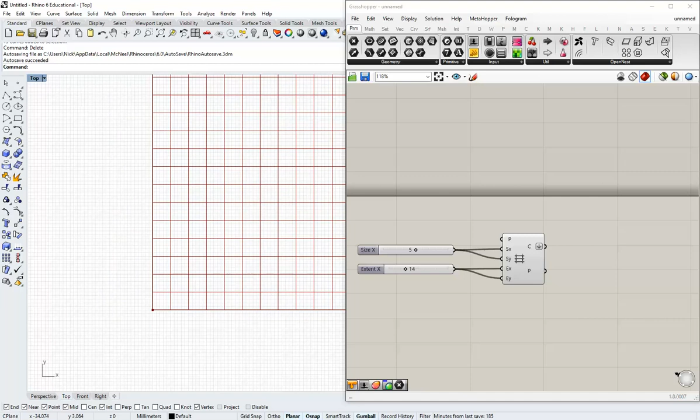Okay, building on this exercise, we're going to talk a little bit about random distributions, and we're going to set up a tiling for that. So you can see here I've got a grid, and you can make it whatever size you like. This fills my screen relatively well, so I'm going to go with that. I'm going to get into Rhino for a second here, similar to what we saw before.

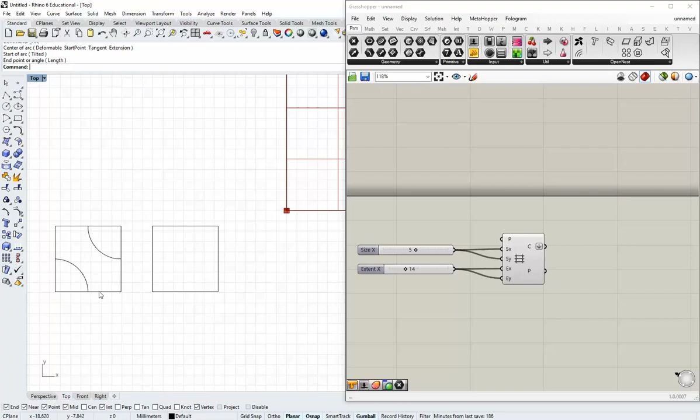I'm just going to draw a box, and then I'll draw another one. All right, just two rectangles. And then for this one, I'm going to draw an arc. I'm going to select that arc command, start at a corner, go to the midpoint, and the other midpoint that's adjacent there. Do another arc similar to that. And then I'll draw the opposite of this, starting with the other two corners. All right, I do that.

Now with this setup, these are the only two really that I can have. This kind of exhausts all possibilities in terms of the way these tiles are related to one another. So that's really what we need.

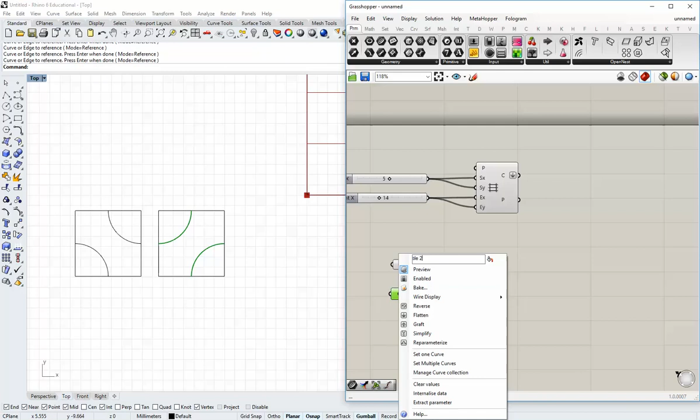So let's go ahead and start bringing this stuff in, kind of like what we saw in the last one. I'll grab these first two curves here for tile 1, then grab the next two for tile 2. I'll grab the boundaries for the tiles, and the other ones as well. Alright, looks good. Tile 1, tile 1, tile 2, tile 2. Great.

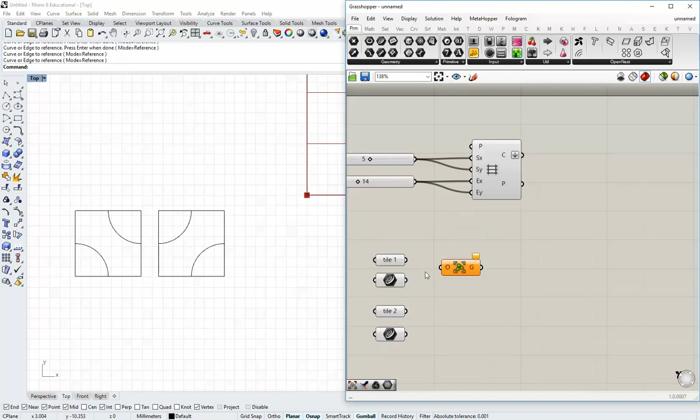Okay, well, we still need to set a group, so I'm just going to go ahead and group that tile geometry, right? Just the two curves in there like that.

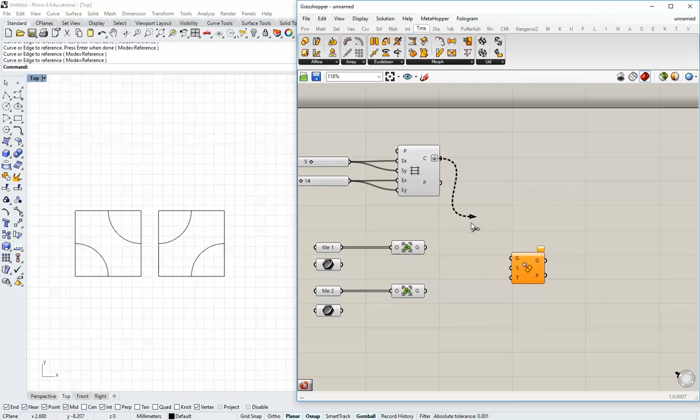In this case, we're going to jump directly into remapping before we start organizing the pattern. So I'm just going to go back over to Transform here. Under Affine, you'll find the rectangle mapping like we did before. The target are these boxes, our grid boxes here. You can zoom out a bit. The geometry we're dealing with is the tiling.

And I'm not going to merge anything this time. Actually, we're going to end up using two of these. We're going to make two overlapping patterns, and then we're going to kind of break it down from there. And then these here are the boundaries for that one. Okay, so that's going to start showing up.

I'm going to do another one, copy and paste that. Instead with this, I'm going to use, making sure that we're using the proper one. Okay, so it's going to look like circles. It's not, but it's going to look like it. And we can verify that here. Right? So we have kind of these opposite overlapping patterns.

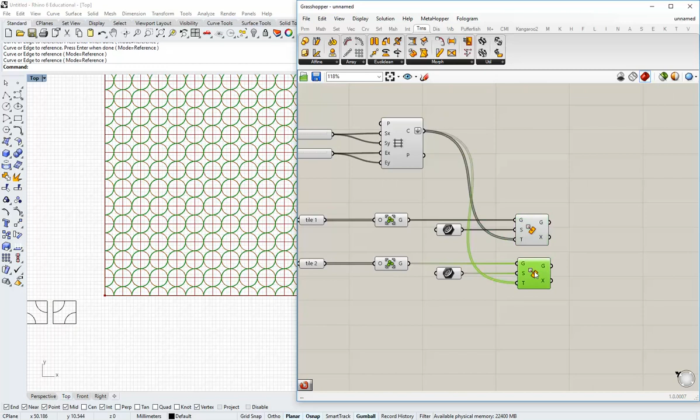Overlapping patterns emerging here. Now we're going to use a random, basically a random selection process to remove some of these and keep others in order to kind of reveal this really interesting sort of looping continuous lines that interlock with one another.

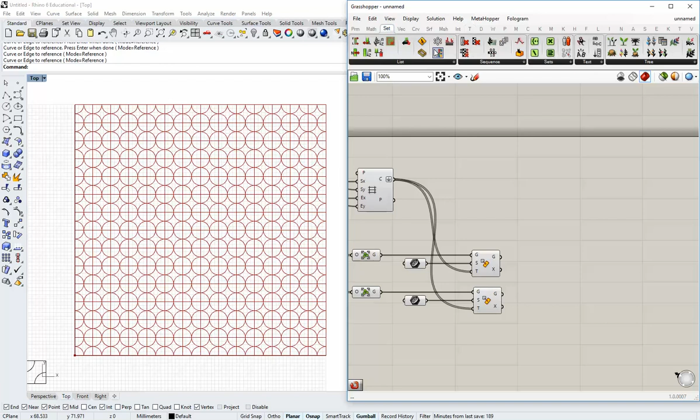Okay, so I'm going to go over to Sets here, and I'm going to grab under Sequence, the Random component. This is going to kind of, it's a pseudo-random number generator. I am going to need a range for this. We really just need a min-max to cover all possible tile options, which really are only two. So it's really just zeros and ones.

Now, if we want a random distribution of zeros and ones, we can get a more even distribution if we kind of expand our domain for that. And there's a little trick for this. So what I'll do is I'll grab a Construct Domain component. The way I've been doing this is to just sort of place in, so let's just do negative 0.49, right, because we're going to do some rounding. This will make sense in a minute. So negative 0.49, and then I'm going to go with positive 1.49.

Put that into B. And then this is going to come into our input there. The number of things overall that we need is going to come from the number of cell outlines we have, right, number of grid outlines. So we'll go to List Length. There's the length here, and that's where we put that in there. We'll deal with the seed in just a moment.

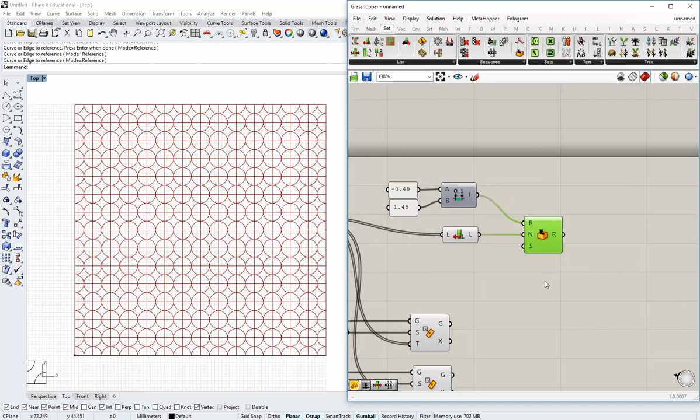Now, there's going to be some decimal points here. In order to do some quick, simple rounding, we can just force those to be integers. So we can just grab over here under parameters and primitive this little integer component.

And now that's going to give us a bunch of zeros and ones, because those decimal values are going to be those random numbers that are between its lowest value and its highest value. And those decimals are actually 5 or 6 values past the decimal point, but they'll still round to either the closest 1 or the closest 0.

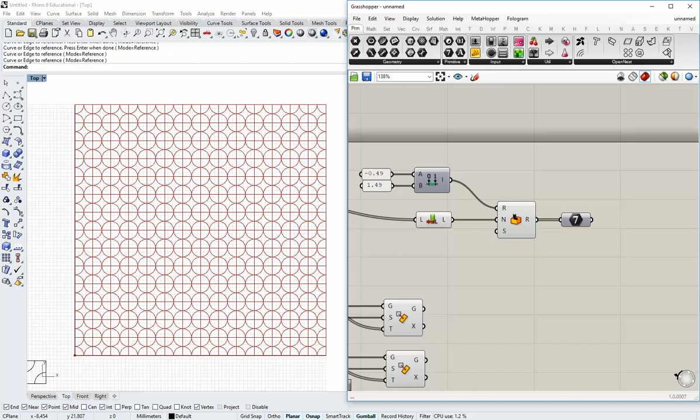Again, if we expand a little bit of our domain for this, we'll get more ones and zeros in a more evenly distributed way, given the random algorithm that's basically being used here within this little black box. All right, so that gives us a bunch of ones and zeros, which is what we need in order to break this pattern down.

And now to do that, we're going to arrange the tiles using the pick and choose. So we'll go over to sets, list, and pick and choose here. Our pattern is going to be this that we just developed, and our inputs are going to be these two. Let's go ahead and hide these, and what's revealed in the end is this pattern here.

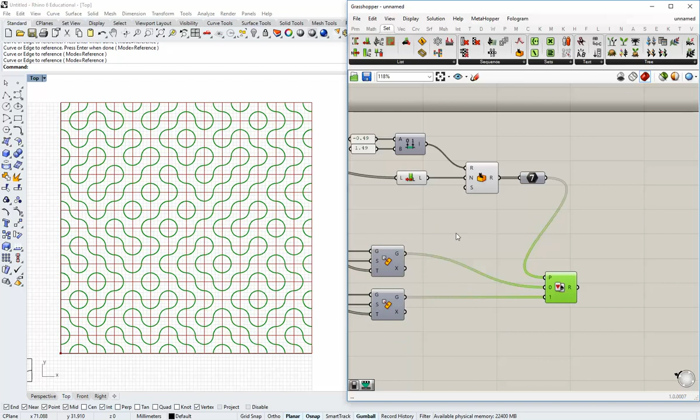So this is just an example of using a simple tiling arrangement that in this case is overlapping all the possibilities, and then using the random pattern creation to pick which ones we're going to see within each cell at any given space. So within this square, it's going to pick the first group, which looks like it's going to be 1. So that will be this one, and so on down the line.

It's really amazing because what we get is a very intricate patterning here of continuous lines that completely transcend the grid from which it came. These are all continuous polycurves. If you join them, they'll be continuous all the way through.

Okay, so this is one way to introduce randomness to it. Of course, this is just one tiling system. These curves are just one way to think about it. There are many, many others. You can draw basically whatever you'd like, so long as things line up at the midpoint, or at least at a common area or a common point along these edges.

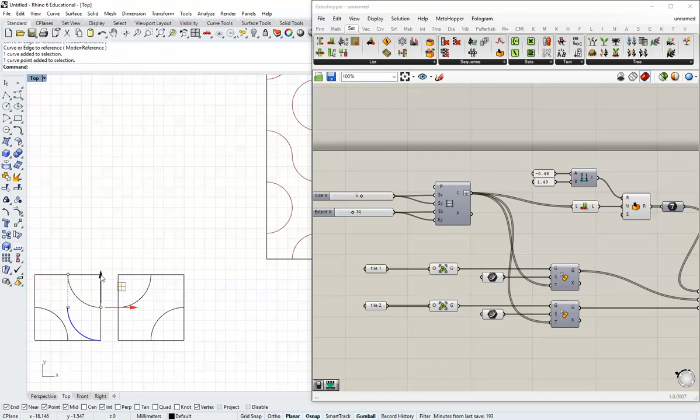Think about how it's going to have to connect to the next cell in space, right? So if you have one that is down here, for example, if I just grab that point and move it, it should update, and actually it will fail. You can kind of see what happened. Now if I move this back to the midpoint, it'll fix.

Okay, so that's one thing to keep in mind as you're working with these tiling exercises, especially if you want them to connect from edge to edge. You'll have to really design them and draw them properly so that that's possible.

Another way to do the same pattern here is to use a hexagonal grid. There's just one extra step that's included that we have to go through.

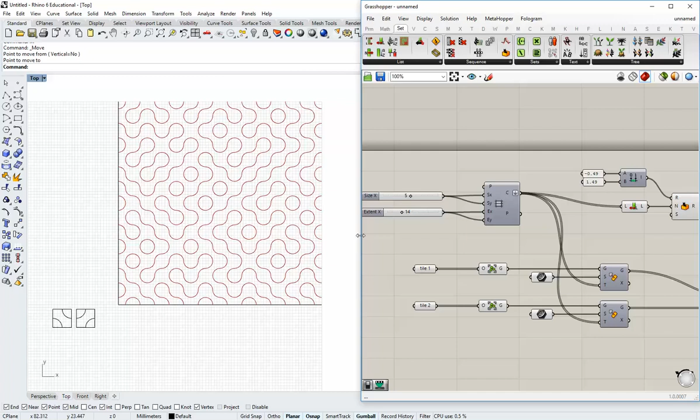And for that, I'm actually going to start again down below. Because this one gets... I think it'll be easier. So I'm just going to turn that stuff off, and I'm going to start again because we're going to start with a different grid this time. Actually, we're going to start with, let's go over to a vector here, and we're going to start with this hexagonal grid instead.

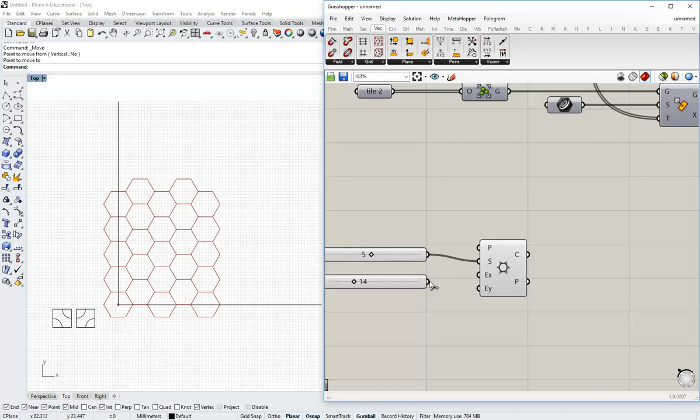And you can go ahead and change your sizing on this. Let's just experiment a little bit to try to fill up my screen. Pretty nice. Let's do that, and then let's see if these values still apply nicely. Well, maybe it's a little big, but it'll work. But anyway, I'll just drop that down to something like that. So there's mine. Actually, I might make these a little smaller to make it a little more dense.

Okay, good enough. Now, with a hexagon, we have more than 2 options to exhaust all possibilities. We actually have 3, at least for the pattern that I'm going to show here.

So I'm going to go ahead and draw a hexagon in Rhino. Type in polygon. Number of sides will be 6. You can set that up in the top of the command line.

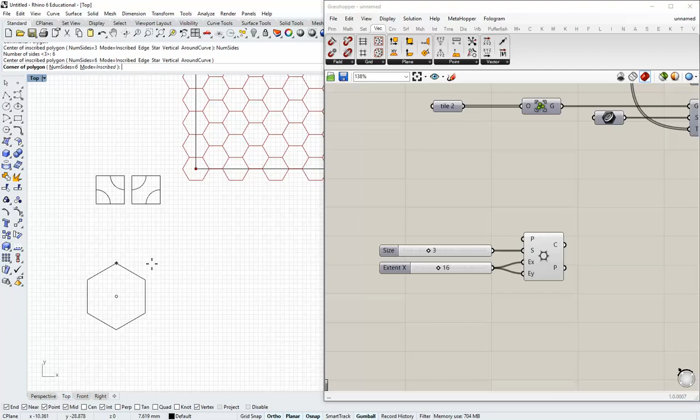I'm going to draw this so that they all are the same, putting the flat edge down like that. I wanted to make it a little bigger, but that's all right. I'm going to make 3 of these, using the gumball, copy over with Alt, and make 3.

So the first line is going to be this. That's our first possibility. The second one is going in that direction, and the third will be going in this direction. Those are the 3 possible crossing lines if we don't use the corner points, for example.

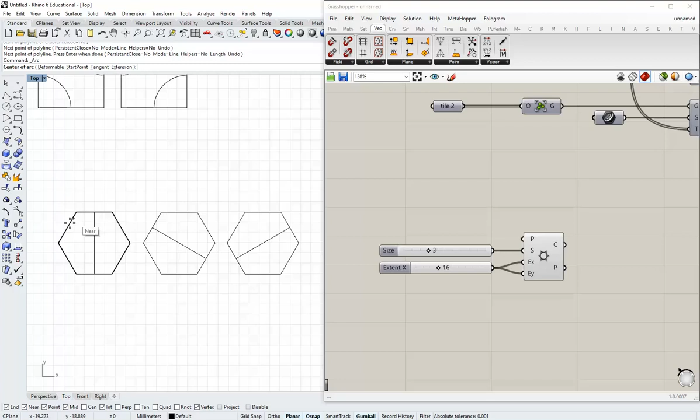Now the arcs that we have available to us: if we start with these corners and swing like that, we can get 2 drawn from mid to mid there. We can also get 2 drawn from mid to mid here, to match the scheme we have on the left. And then we'll follow suit here so that it's basically the same tile exactly, just rotated.

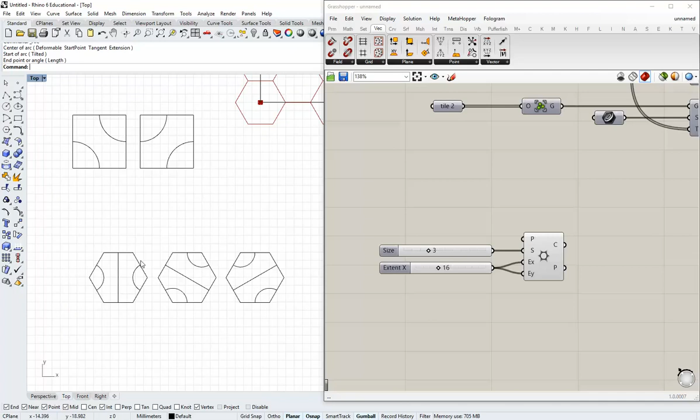In this case we have to do something a little tricky. We actually have to put a bounding box around the whole thing, and then we'll remove the hexagon later, because we're still dealing with this hexagonal grid, which is a bit trickier. We still have to use a rectangle mapping to do this, since there's no hexagonal mapping component. So we have to basically fool it a little bit and then do a little work at the end. Let's go ahead and do that first.

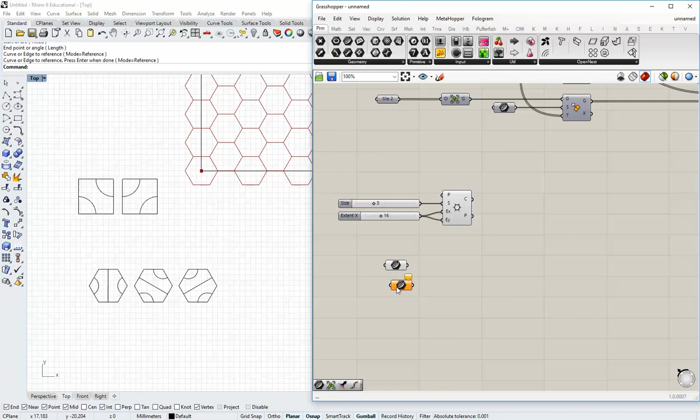The first thing is just going to be simple. We'll use a curve component here, set it to multiple, and I'm going to select all this, the whole thing together. This includes the hex boundary, and I'm going to do that for each one. Select all of them, make sure you select multiple there, and there we go. Then we'll do it one more time.

All right, we have 1, 2, and 3. Now we're going to group all that. Go ahead and just type in your group here.

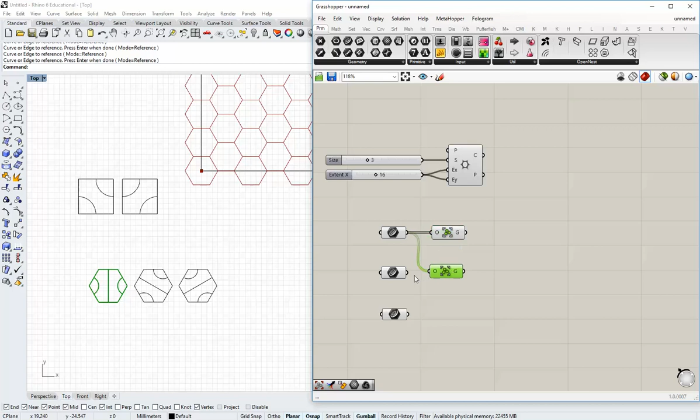What we're going to do then is put a bounding box around these things. I'm going to go into transform, I think. Let's find out. I'll type in bounding here, and grab the bounding box component. You can find it in surface and primitive.

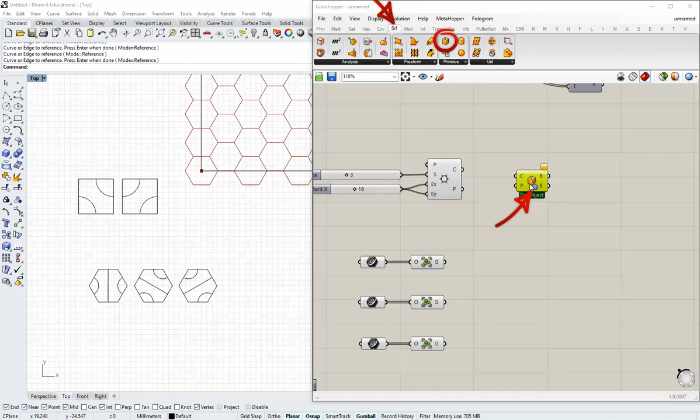It says here per object, but what I actually want to do is make that union. I don't want 3 separate bounding boxes per line; really what I want is just one to cover all of it. Make sure that's set before you continue, and we're going to do that for the entire group. So you can see there's a single box being drawn, a flat box around each one of those groupings of little tiles we're going to use here.

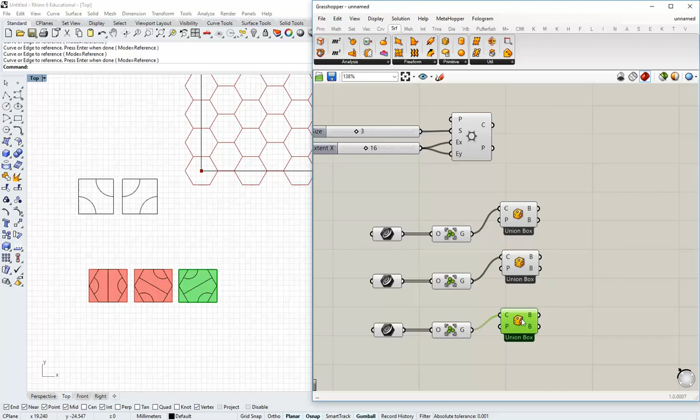And you can turn those off, we really don't need to see that. The nice thing too is that this outline gives us 2 different outputs here. One is, well, I guess they're both boxes. Let me see if there's a difference — I don't know that there will be. I'm going to end up using the second one in any case, so let's just move forward, no need to overthink.

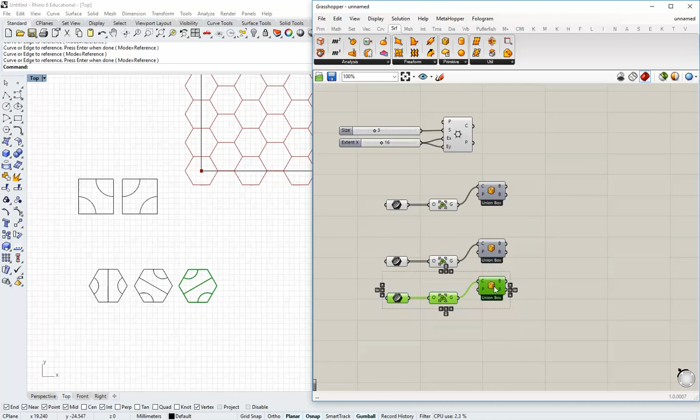Let's go back then to our rectangular mapping. We know we want to go back to transform, affine, and rectangle mapping. The source is going to be that box for each one. We're going to need 3, right, that's going to be the source.

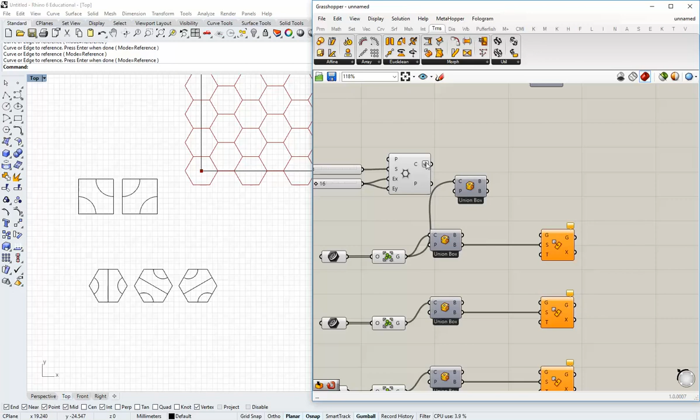The target now is going to be another bounding box around all of the cells, the hexagonal cells. Remember that we need to flatten this, so flatten that output and put another bounding box around all of those. And you kind of see probably where this is going now.

In this case, we want these to be per object, so let's turn that off. That makes more sense. We're putting a single box around each one of those hexagons in the big grid. Now we can compare these with those, basically. We can move stuff that's in this box up here.

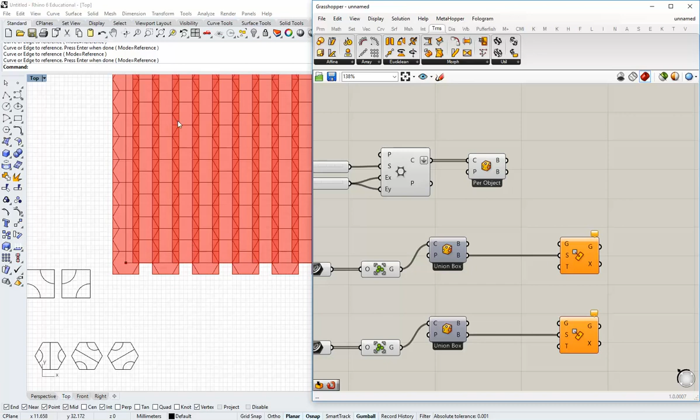And then the only question remains is to just get rid of the hexagon. We'll have to just kind of pull that out after the result is complete. Let's check that out in a moment.

Now in this case too, I'm going to introduce a different way of developing random values, and I think it works a little bit better for this exercise. I'm going to move that down a touch. Now we have a number of tiles. I'm going to put 3 in there. That's the number of tiles we have.

I'm going to go over to set, sequence, and introduce the series component. This is really nice, I use it pretty often. Basically, this gives you a list of numbers that has a starting number, and you can put anything in between in terms of step size. We're going to leave that at 0 and 1. And then the number of things we want is 3, so that's just 0, 1, 2. Now, if you have more tiles, you can change this.

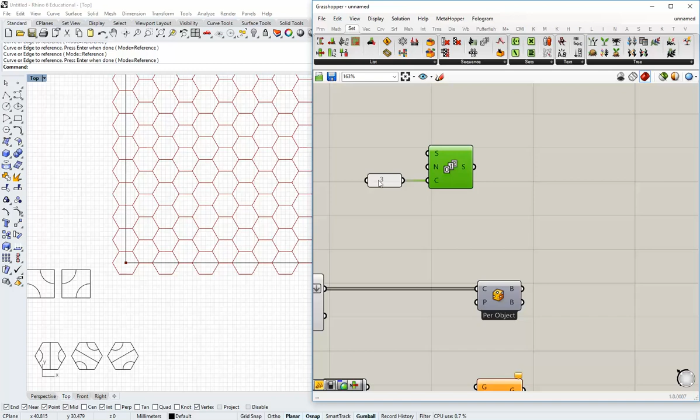Just to illustrate that, I'm going to put that in through an integer. And then I'm going to repeat this data a certain number of times, and that number of times is going to come from the number of cell outlines I have, the number of grids, hexagons. So we'll go ahead to set list length. That's how many things we have, 256.

And then we can go back to set sequence and repeat data. So this is the data we're repeating, and we're repeating it so that we can exhaust 256 of these items in a sequence. Now what I want to do here is, it gets kind of fun.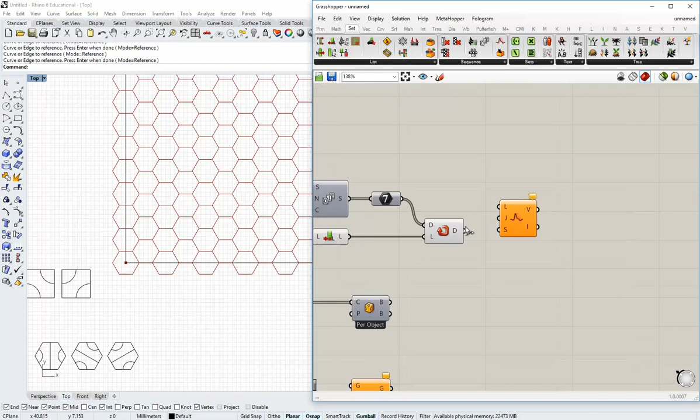Instead of what we did up here, which is to randomize the 0s and 1s, what I can do is just shuffle the organization of this repeating data set using the jitter component. So we go over to sequence here, again under sets, and find the jitter component, which is also fun to use. So we can take this data and jitter it anywhere between 0 and 1. Let's just grab a parameter here, a baseline parameter. 1 is going to be most jumbled, and 0 is going to be less.

So actually I'm going to start with 0 just to show it off. And then the seed, again, we can make different iterations, and I forgot to show that on the last one, so we'll do it in this one. Now the last thing is to distribute the tiles.

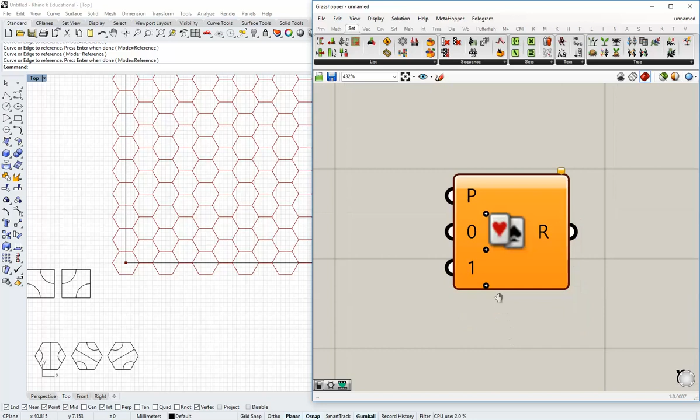Okay, so we're going to go back to sets here, and reuse that pick and choose component like we did before, except this time I'm going to zoom in a little further, and I'm going to see these little plus signs pop up, and I'm going to hit that so that I have at least one extra, because I have three groupings I need to deal with. The distribution pattern is going to be this here from the jitter. And then it's just as simple as finishing all this off here.

So we have geometry that's got to come out of our group. Right, so that's our geometry. I'm trying to do this in a way that makes... there we go. And our target is going to be these boxes, so let's do that.

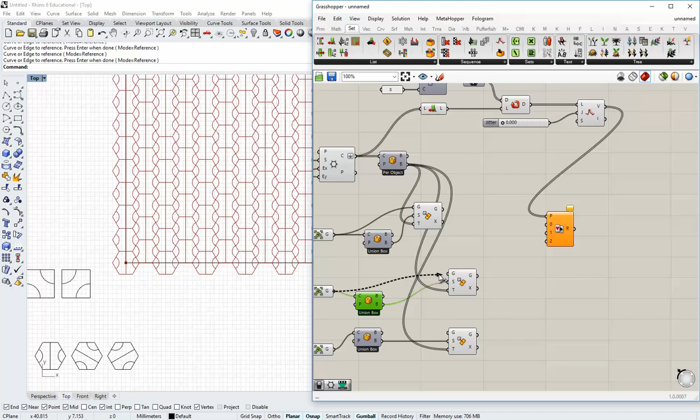Now I'm going to go ahead and just move ahead here and put all those in. I'm going to put these in there, and I'm going to move that down and put that in there. You can start to see there's a bunch of overlapping stuff going on. It's actually quite beautiful, in fact. The relationship between triangles, circles, and hexagons is made pretty clear here, which is nice.

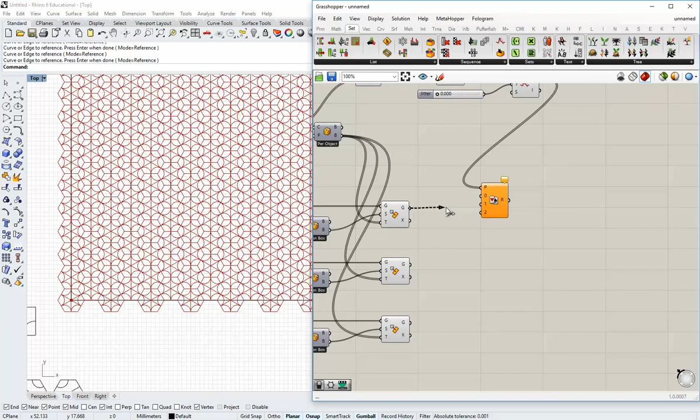But it's not really what we're going after in this particular example, so we're going to keep moving. And then we just want to put the results of these remappings into this pick and choose component and redistribute based on the pattern above, the jittered pattern above.

Let's turn off that original hexagonal grid there. And before we move on, let's go ahead and play with the slider here. You're going to start to see more randomization if we go all the way up to 1, and a little less if we go to 0.

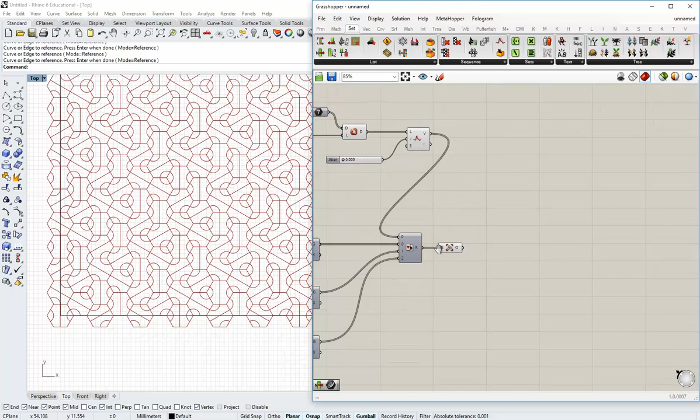In fact, that's kind of hard to see, so let's move on to the next steps here and wrap this thing up. We have to ungroup the results, so go ahead and type that in. And we're going to get rid of the hexagon that came with the group. We used it in order to form a bounding box that we know would line up to the other bounding boxes. That's what we used it for.

I'm going to go to curve, and then measure the lengths of each one of these things. I know that the hexagon should be the longest. So this is a nice way to introduce sorting and kind of selections based on data.

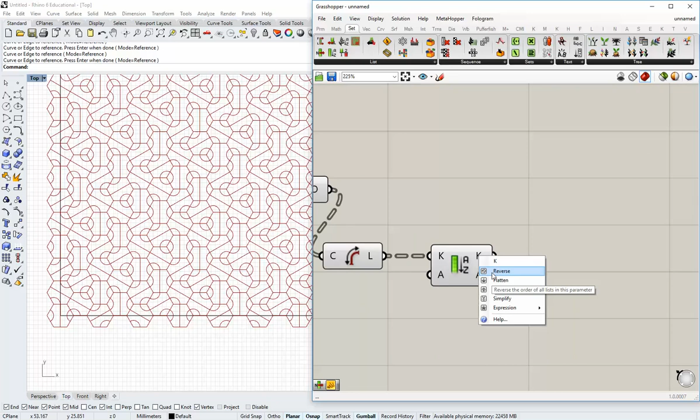I'm going to go to set, list, and sort. By default this is going to sort things from small to large. I'm going to sort my k values, which would be my number values. I'm then going to reverse this list because I know that the last one is going to be the longest, because that's how the component works.

I want to make it easier to find that, so I'm just going to reverse it so that I can use a single list item component, and the first output of that, because this is an index of 0, is going to end up being my longest line. Any questions about that, feel free to jump on the Zoom call and ask.

Now the last thing is this: we need to test for, we need to develop a culling pattern. We need to find a way to remove items from here based on this information.

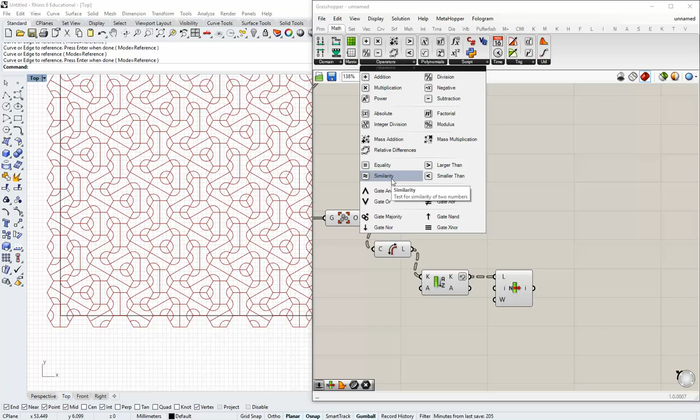I'm going to go to math, and under operators I should find similarity here. And the lengths that I'm going to test is going to be all of those, and I'm going to look for this one. So which one is going to be most similar to that one? That's going to give me a bunch of true false values.

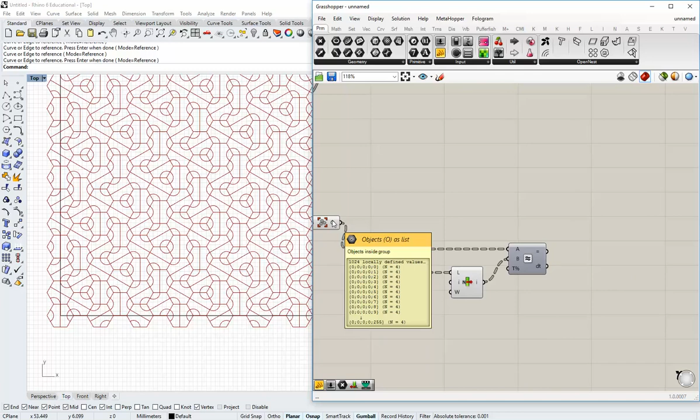True should always be the first one, so there's, to be honest, probably an easier way to do this. But anyway, that gives me the pattern that I need in order to basically remove the longest one from the list here.

So I'm going to go to set, sequence, again the cull pattern, this one we used before. This is going to be the list of objects, the ungrouped, redistributed things. And then here's my culling pattern for that.

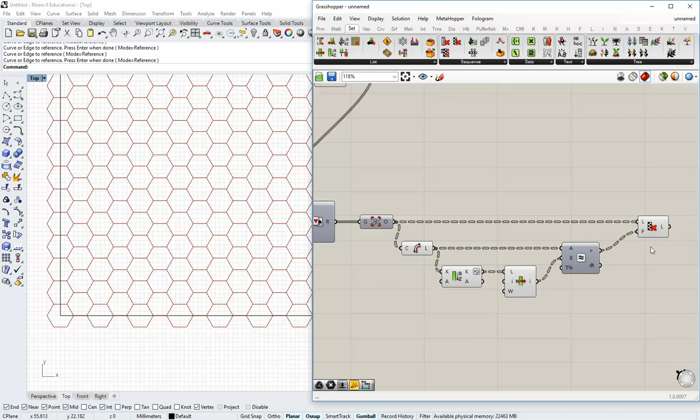Now I should be able to turn that off, and it looks like I removed the small ones. So actually what we want to do is reverse this pattern back again and invert that by right-clicking. And what's revealed is the pattern left behind. So basically I removed the hexagon and left only the tile geometry behind.

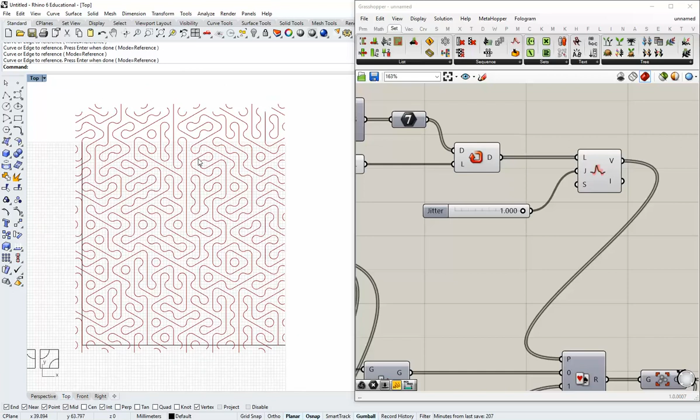And I get nice clean connections. Now you can see there's a repeating little figure in there, right? That's because the jitter is still at 0. So if I crank that up a bit, now we end up with a pretty nice randomized distribution of those tiles, forming these kind of little sovereign objects, versus long lines that are continuous all the way throughout in a really complex way, maze-like, and so on.

So that's one way of working with hexagonal grids and tile shapes, which adds another edge basically, or adds multiple. Like I said, it adds 2 more edges than the box was able to give us. And because of that, we have more directions that these lines can go in, and more complex patterns that can be revealed. Give it a shot.

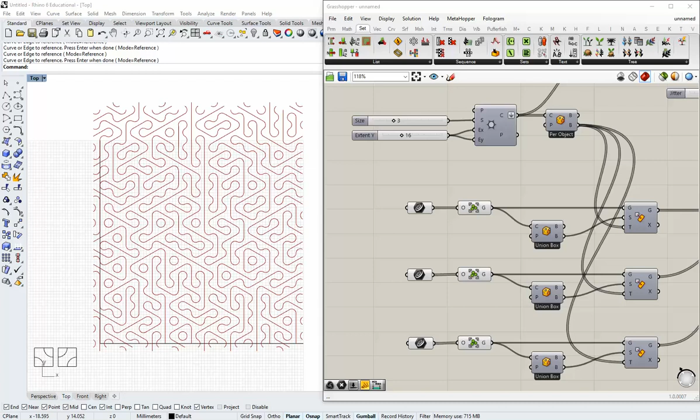Maybe you can try different options. While we're in here, you can try a different tile. In any case, either of these is relatively easy to experiment with. Really, it's just a matter of drawing some logical set of tiles that relate to one another in Rhino, and then redistributing those using Grasshopper a little bit, with just a basic understanding of lists in order to do it.